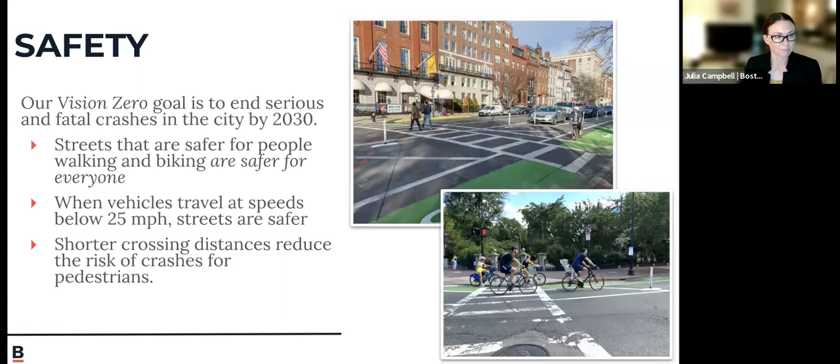You're also going to hear us talk about bikes a lot today. The reason is that most of our streets, especially just a few years ago, didn't have bike infrastructure on them. So we're adapting streets across the whole city to more modern ways, and that includes changing them to include bike lanes sometimes.

We're talking about creating a network, a connected series of facilities where people can use bike lanes to get from one place to another to get where they need to go, so it can actually be a viable form of transportation. We're pretty excited about the network we're talking about in the Back Bay, and we're grateful for the feedback we received last year, which we've responded to in some of the designs you'll see today. We think it's helping us make a really good network.

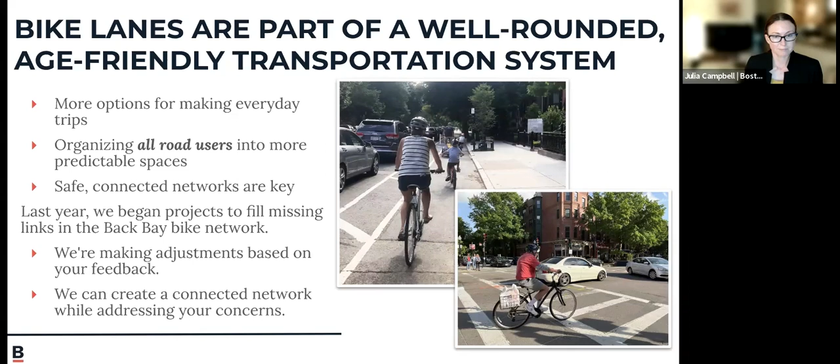So what are we doing here? For the Back Bay, we recognize this is a part of the city where walking comes first. This is a very dense area, with a lot of dense residential area as well as mixed-use commercial. It's the heart of the city in terms of tourism, with people coming in and out and going to different destinations from all over the world.

We understand that most people accessing these destinations from across the world are on foot at some point in Boston. They're accessing the Public Garden, the tourism centers, getting on and off buses, riding bikes. We understand that's actually the core of how people are traveling. Every time somebody gets on and off transit, they are also a pedestrian at some point.

We've also heard, and see every day, that curbside access is very important to the functioning of businesses in the Back Bay, and that limited curb space is really valuable. We understand that's in high demand, and a lot of the changes we're making are intended to help the curbside function better, bringing organization and priority to the people who need to get in and out so our businesses can function.

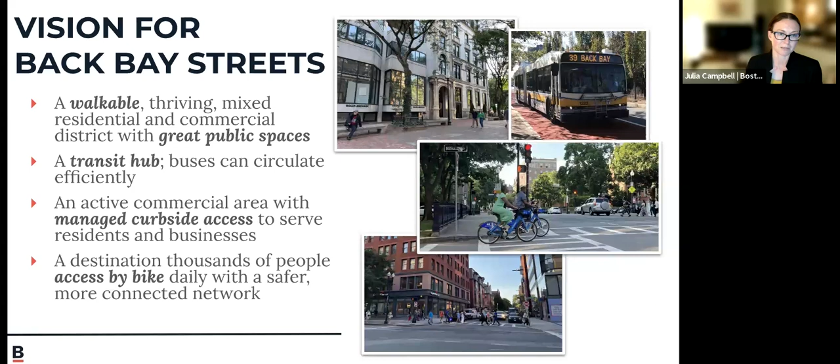So lastly, we will be talking about bikes, but we understand the core is pedestrians. Every time we put a bike facility in place, we are also accommodating pedestrian safety at the same time.

Among the many projects we're running through today, some you might have heard about as far back as 2019. Most of the Better Bike Lane projects we're talking about today were announced by Mayor Wu in fall of 2022, and you probably heard from us or met us in the street at one of our pop-up events last year in the spring and summer when we did a lot of outreach about these projects. Thank you if you talked to us before.

What did we hear from you? We heard all ends of the spectrum. People were really excited about changes to the streets, pushing for safety, and many were really excited about bike lanes and feeling safer riding bikes. We also heard a lot of concern about change, and what these changes would mean for people's daily business. These are some of the comments we're doing our best to encapsulate into just a few points.

We heard concern about maintaining infrastructure for pedestrians and drivers. We heard questions about whether there are other bike routes we could consider, different from the ones we were proposing last year. The answer to that is actually yes. Thank you for those comments last year, and we'll show you those changes in a few slides.

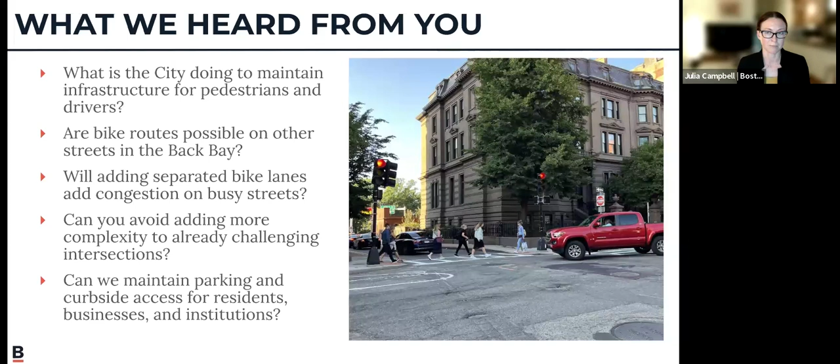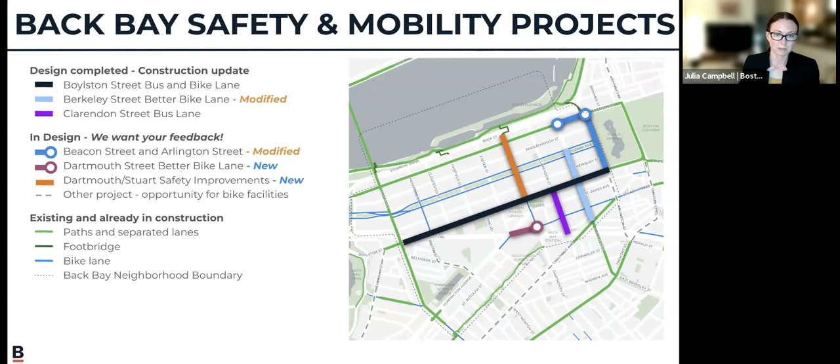Go to the next slide. All right, so now I'll run through quickly the projects that design is all done, and they're going to be entering into construction in the next few weeks. Here is a map of just those projects.

Boylston Street is going to be receiving a separated bike lane, as well as two types of bus lanes - a peak hour bus lane and an all-day bus lane - as well as one block of sidewalk reconstruction from our team. There will also be sidewalk reconstruction on the other side of this block, done by the Parks Department on a separate timeline. Our contractor is going to go through with the installation of the different lanes first, and then that same contractor, as soon as they're done with the lane work, will begin work on the sidewalk reconstruction from Dartmouth to Clarendon, so it'll be one continuous flow of construction.

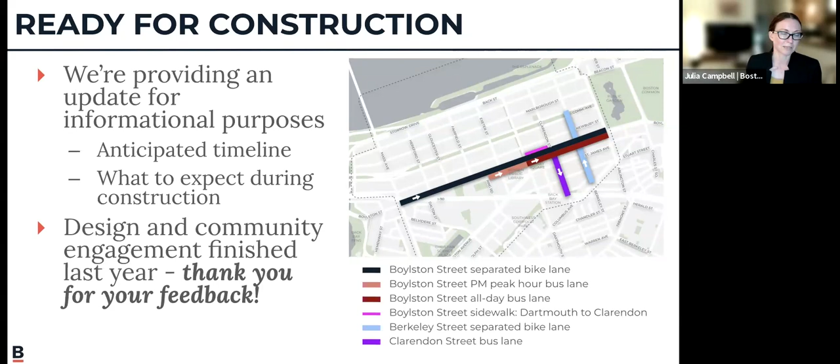Then we also have Berkeley Street Bike Lane and Clarendon Bus Lane. Again, if you have any questions about these, there will be a breakout group. We can go to the next slide, and we'll highlight a few elements of each of these projects quickly.

Just as a reminder, these should not be new - these are projects we've talked about for quite some time. We've got our bike lane, different kinds of bus lanes, and we still retain two lanes for automobile traffic. This will also include some signal work and rebuilding the sidewalk. We can go to the next slide.

Berkeley Street, we're going to be repaving part of this street. Again, that does include upgrading the curb ramps to be ADA compliant, and this is, of course, to install our separated bike lane. There's also going to be some signal changes here.

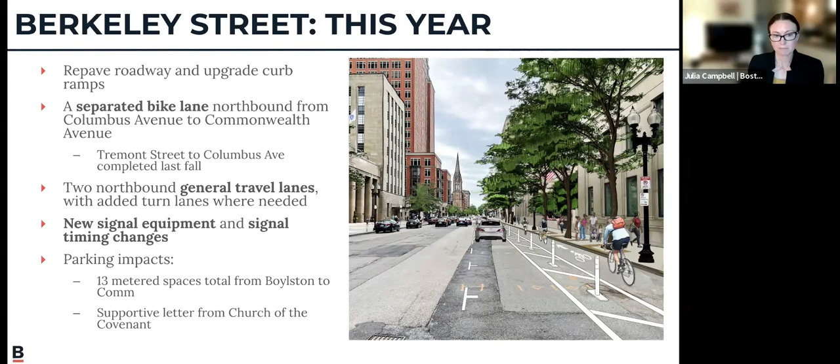And we can go to the next slide. Clarendon Street, later this year, is actually going to formalize and make permanent a bus lane that we first began running in the 2022 Orange Line shutdown. This will include, again, some repaving, upgrading those curb ramps, and this is going to serve routes 39 and 55 from the T-bus.

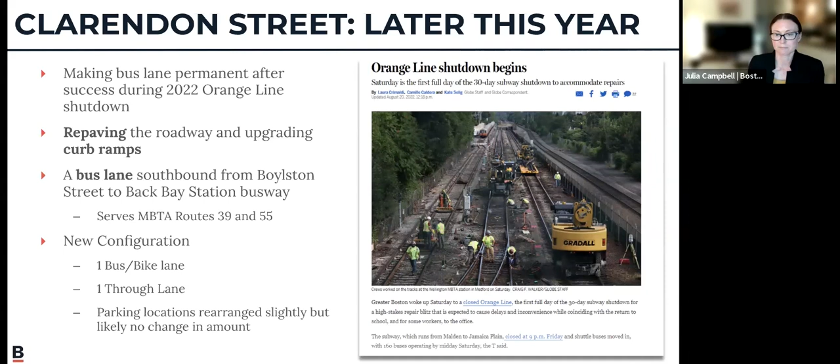We'll go to the last slide in this section. So in the very first part of our construction season, we're going to be doing the Boylston Street work, and that again includes the bike lane, the bus lane, and the reconstruction of the sidewalk. The other projects will follow after that. We do not have exact dates for all of this work right now - we don't even know the exact date because we are finalizing the contracts with our contractors.

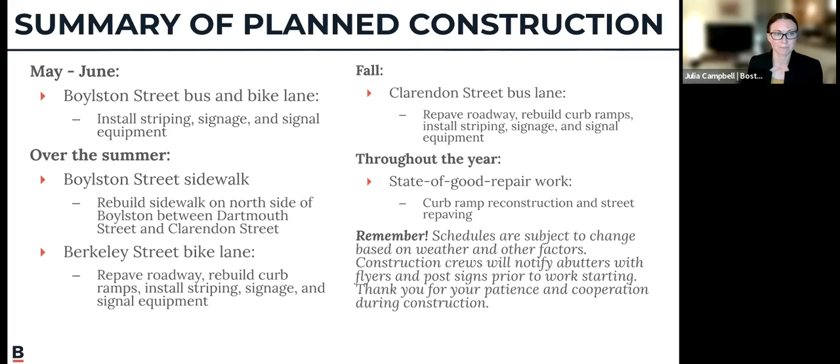Okay, and with that, I will pass it to Nathaniel to talk about projects that are in design.

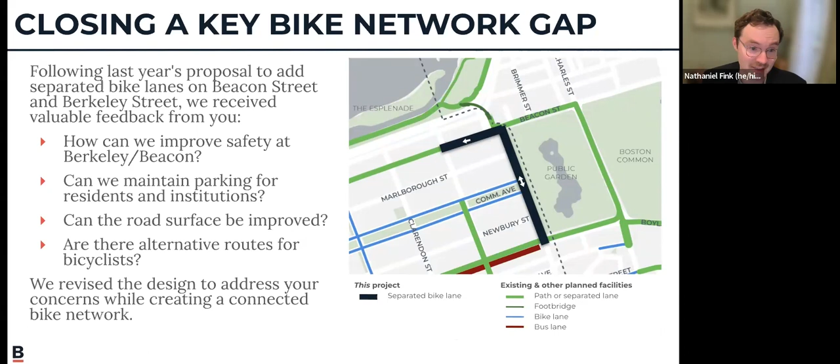So I'm going to start by showing what our initial design proposal was last year. Just a few features: towards the left of the screen, we were proposing a separated bike lane coming north on Berkeley Street to Beacon Street. On Beacon Street, we would have had a two-way bike lane along the northern curb where there's currently parking. Then at the intersection of Mugar Way, we would have had a crossover. Bicyclists going westbound would have crossed over there and continued westbound. Bicyclists going eastbound to the Fiedler Footbridge would have been advised to walk their bikes over to the footbridge at that point.

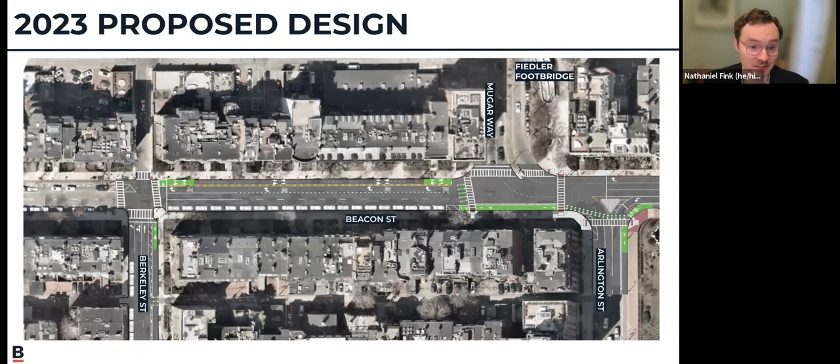This is the revised design proposal. I'm going to walk through various features as they apply to different modes of transportation in the area. Feel free to take a look now, but I'll be diving in more, and we'll have the opportunity to talk through any of these things in the Q&A. We'll also be posting this information on the website for your individual review later.

Okay, so let's talk about pedestrians. One of the key changes is that we're proposing a change to two lanes going westbound on Beacon Street. That right lane would be a through-right lane. I'll get to traffic capacity in a few slides, because I know changing the number of lanes can be a concern. But right now I'm going to talk about why we think this will improve the safety situation.

Right now, because of the queuing, there are sometimes frustrated drivers who have the ability to cut to the front of the queue. That's because there's a center lane that's supposed to be a through lane, which folks use to cut off and get ahead of the right-turning traffic waiting in the right turn lane. With a through-right lane combined, we think this will make it harder for drivers to turn when they're not supposed to.

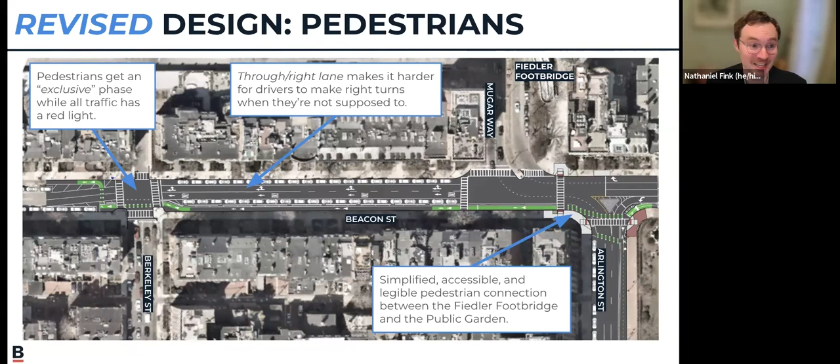We want to make it so that you cross this intersection in 2 stages and really have those crossings lined up much more clearly with the desire lines of where you want to go. It's going to bring you in a direct path onto the plaza at the landing of the Fiedler Footbridge. This will also come with intersection signal timing changes to facilitate the movement of all users through this intersection. We will also have signals and crossings for people biking, and we'll make sure that vehicle traffic is flowing through here as best as it possibly can, given the high volume seeking to access Storrow Drive.

If you are biking, I'm going to start with the revisions to how we are proposing to get to the Fiedler Footbridge. Today, the bike lane along the Public Garden on Arlington Street is one-way southbound. We want to change that to be a 2-way bike lane, so you will be able to bike northbound to Beacon Street.

At that point, there will be a series of marked crossings and signals that will allow you to cross both Arlington Street and Beacon Street to access the plaza in front of the Fiedler Footbridge. Previously, we would have had you coming up Berkeley Street and then turning right onto Beacon Street.

Also, a key feature of this is that we're proposing to move the bike lane on Beacon Street to the south side. One of the big advantages of that is that it avoids conflicts with the right-turning vehicles who are turning right from Beacon Street onto Berkeley Street to access Storrow.

And then lastly, previously, if you're going westbound on Beacon Street, we would have had you crossing just west of the crosswalk at Mugar Way. In this revised proposal, you would cross Beacon Street to the north side just west of Berkeley Street. You'll also have a dedicated phase in which to do that. We do not want to leave you stranded there, of course.

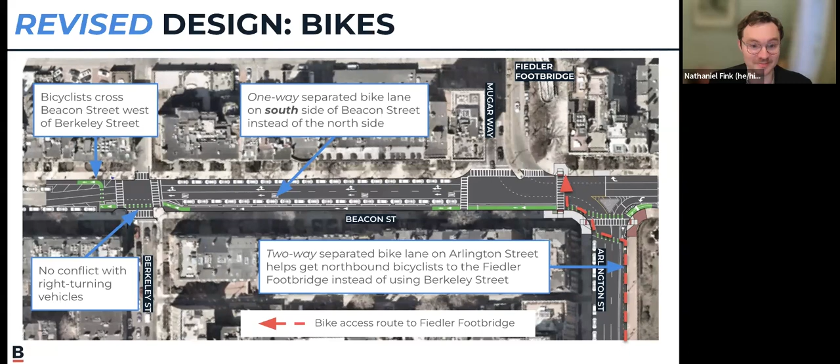And then how this all kind of fits together: this is a map showing connections going northbound for bikes to the Esplanade. Previously, we would have had one connection, which would have gone up Berkeley Street to Beacon Street, turned right, and then turned left onto the Fiedler Footbridge. We now have 2 different options if you're coming from the south, as well as the option of coming from points west along Boylston Street.

And with the Dartmouth Street project, which I'm also going to get to in a few slides, there will also be the option to access the Dartmouth Street footbridge, both by going north on Berkeley Street to Comm Ave, or by coming eastbound on Boylston Street from the west, turning left on Dartmouth Street.

So really, we're trying to stitch together all of these different connections. And while we do acknowledge that we are proposing to remove a link in the network that we were initially proposing, we really do feel like this is a better option because there are more options to filter through the street grid and to get to the various different points.

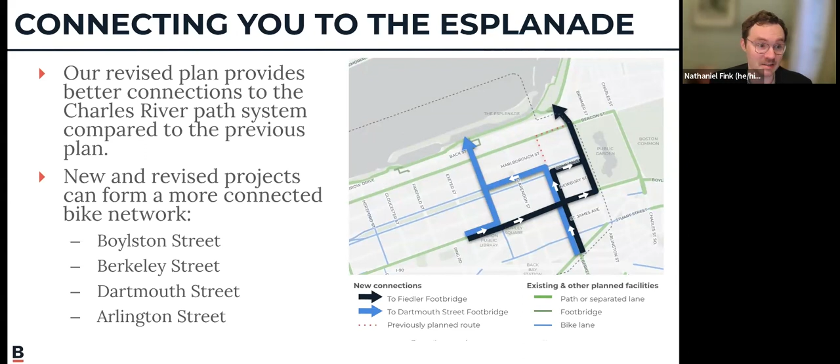Okay, parking. We know that there was a lot of concern about loss of parking in this area. I can say with this revised proposal that we would be keeping parking on both sides of Berkeley Street in between Comm Ave and Beacon Street. We would also be keeping parking on both sides of Beacon Street in between Mugar Way and Berkeley.

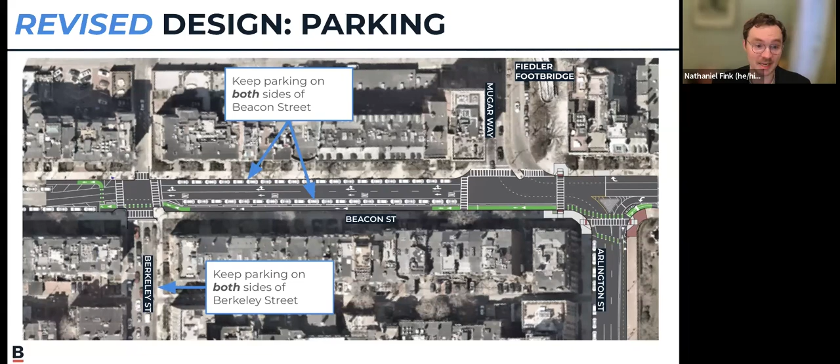So while there will be some marginal reduction in parking spaces right around the intersections and a few just west of Berkeley Street, the net change is significantly less than what we were initially proposing. We're really striving here to maximize the number of parking spaces we can while still achieving these goals of connecting the bike network and keeping all travelers moving as safely as we can.

Okay, traffic capacity. As I mentioned previously, we are now proposing to have two lanes on Beacon Street westbound. The right lane will be for continuing straight and turning right, and the left lane will be for continuing straight only. On Berkeley Street, we're not proposing any changes to the number of lanes that are there today.

I want to take a moment to talk about how we plan and design traffic signals. We have standards and processes that we use when considering changes to any signalized intersection anywhere in the city. I'm not going to go into a lot of detail, but we generally follow a few steps. First, we gather traffic data to understand the current conditions.

The data we used to model this particular intersection was collected in late 2022. We know that conditions can fluctuate throughout the time of year, and we also know that conditions have fluctuated quite a bit since the onset of COVID. Nonetheless, we are confident that data collected late in 2022 is generally still representative of traffic conditions.

If we had collected this data in 2020, we would have definitely recollected it more recently. So that is our starting point for this analysis.

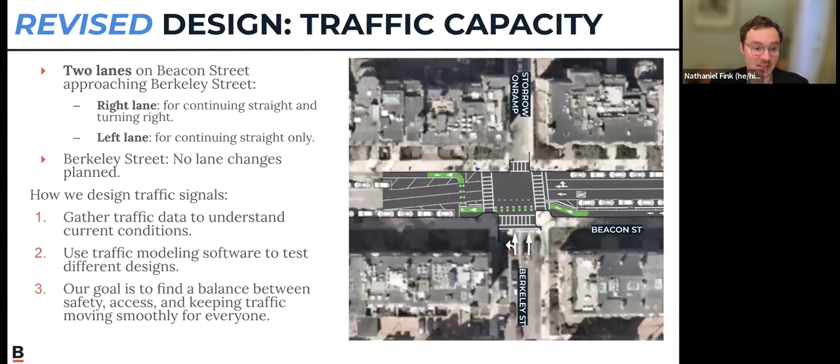So I'm going to show the results of some of our modeling. In the proposed condition, this is what we have modeled as the 50th percentile—that's roughly about half the time. And the 95th percentile is the vast majority of time. These are how long we expect the queues in the morning to be.

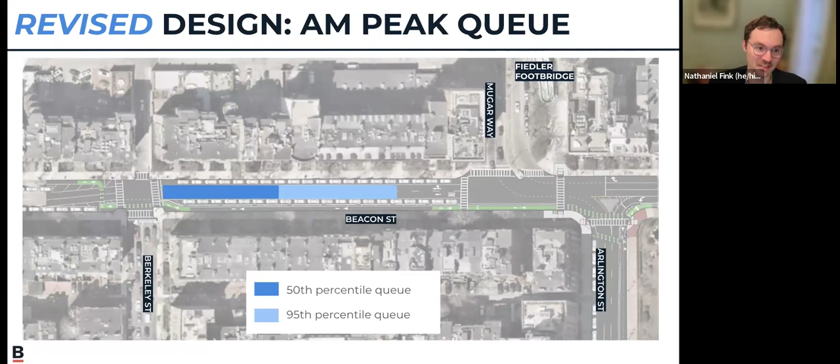Folks who live in this neighborhood will know that it's much busier in the afternoon, so I'm going to move on to that. In the PM peak, you can see a little red line here that indicates where our model shows the current 95th percentile stretching back to. With the proposed condition on Beacon Street, it goes a teeny bit further back, but not significantly further.

Now, we also know that there are times when not only Beacon Street, but Berkeley Street and Charles Street are all backed up. Sometimes Storrow Drive is at complete crush capacity. Although we would like to keep folks moving through here, frankly, there is no amount of lanes we could add to Beacon Street and Berkeley Street that would facilitate that in those situations.

Because you have all traffic basically filtering down to a single lane going onto Storrow. And if the road itself is already backed up, or say someone drove a truck onto Storrow Drive and crashed into one of the bridges, there's any number of conditions that could result in that road being congested. So what we are trying to solve for is the vast majority of time when Storrow is relatively free-flowing.

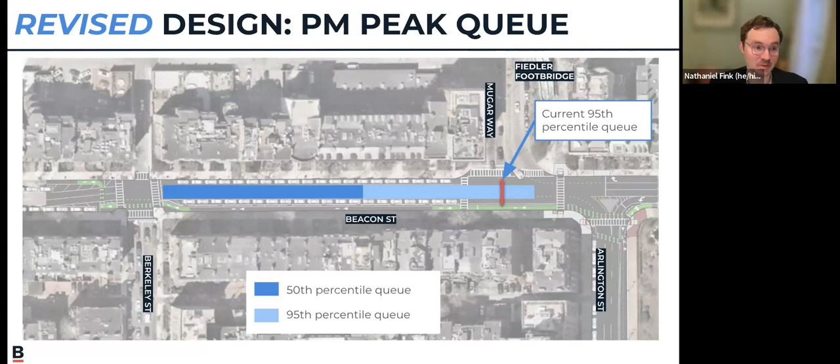And again, that is what we call the 95th percentile. So we acknowledge this is a model, but this is the method we use to analyze before and proposed conditions and compare them to one another.

I'm going to walk through the signal phasing, and that is what we're proposing at this intersection. During the first cycle, this is when all Beacon Street westbound traffic would go, including right turns onto Storrow Drive. During this phase, we can also have the southern crosswalk on walk because there are no conflicts across it.

If you are biking, you will also go with this green, and then you will wait in a little staging area just on the west side of the intersection.

So phase 2 is a phase that will come up if you push the pedestrian button. If you do not, it'll go to phase 3. The reason for that is it allows the model to run a bit more smoothly. If anyone is trying to cross on the northern crosswalk, or any crosswalk, and pushes the button, this phase will come on after Beacon Street has its green. In this phase, all of the crosswalks are on, and if you're biking, you can complete your crossing of Beacon Street onto the north side, where the protected bike lane continues in the westbound direction.

Cycle number 3 is when Berkeley Street traffic goes. If no one pushes the pedestrian button, this comes on after phase 1. If it comes on after phase 1, you get what's called a leading pedestrian interval, or pedestrian head start, where the walk sign comes on a few seconds before vehicles get their green. That allows pedestrians to become established in the intersection and partially complete their crossing before traffic starts moving. Bicyclists waiting in the staging area should also have enough time to complete their turn. I want to emphasize that leading pedestrian intervals are one of the safety features we can implement, so that no matter what happens, whether someone pushes the button or not, you'll have a safer way to cross the street.

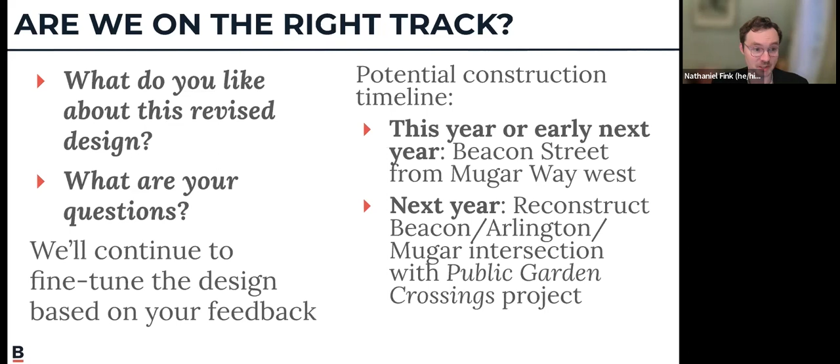We're going to continue talking to you, answering your questions, and fine-tuning the details as we go forward. I also want to note that the intersection of Arlington Street, Mugar Way, and Beacon Street is part of a project called Public Garden Crossings. It's technically a different project with a slightly different timeline, and it will be constructed under a different contract. So what this likely means is that we'll get to Beacon Street from Mugar Way west before we get to that intersection of Arlington, Mugar, and Beacon. The conditions we've been discussing, shown in these extended slides, reflect what the final condition will be. I'm noting that to set expectations—we're moving towards having this connection for pedestrians and bicyclists fully built, but it will happen in different phases.

Okay, Dartmouth Street at Stuart Street. I'm going to pause for a quick sip of water now.

The location of this project is at the corner of Stuart Street and Dartmouth Street, about 1 block away from Back Bay Station and about 2 blocks away from Copley Square. This is a heavily used intersection for pedestrians. Based on feedback from the community and your elected leaders, we looked at this intersection and found some quick build interventions we can do here. Some of the issues you brought to us were uncomfortable pedestrian crossings and high turning speeds for vehicles, made possible by very wide turning lanes built in the 50s and 60s to accommodate fast-moving traffic, not reflective of the dense urban environment we have today. The data also bears this out—this intersection is a high crash intersection for all modes of travel, based on our Boston Vision Zero safety data.

The timeline for this project, because it's a quick build project, is potentially 2024 construction, and if not, 2025.

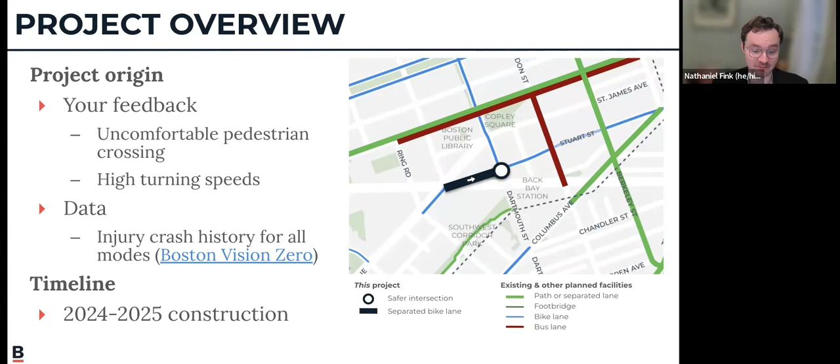This is a preview of the design that we're working on. We're hoping to use quick build materials. Those are things like changing the roadway striping, changing the signage, and putting up flexible plastic barriers.

What we can do is shorten the pedestrian crossings on 3 out of the 6 crosswalks at this intersection. The crosswalk across the northern leg, which allows drivers to turn from Stuart Street onto Dartmouth Street, we can make about half the length it is today. We can also shorten the main crosswalk across Stuart Street on the west side, as well as the crosswalk across the slip lane that allows you to turn from Stuart Street onto Dartmouth Street southbound. That can also be about half the length it is today.

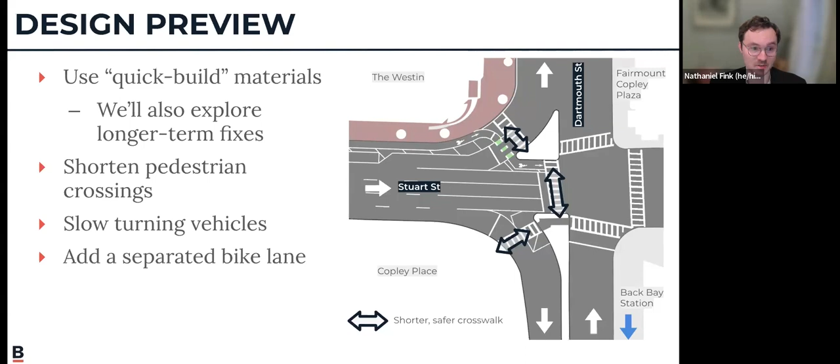These are quick fixes. We are also hoping to explore longer term fixes that would potentially involve bigger changes to this intersection, possibly partnerships with development that may or may not occur in this area in the foreseeable future. Lastly, there is a bike lane on this section of Stuart Street between Huntington Ave and Dartmouth Street. With the space left over from narrowing the vehicle lanes and turning radiuses, we can provide a protected bike lane for that one block that gets you as far as Dartmouth Street. So this is an upgrade to an existing bike facility.

Okay, so this is another new project. This came out of our conversations last year, both with the community as well as the feedback you gave to your elected officials. We are looking at a project to put a bike lane along Dartmouth Street between Boylston Street and Back Street. This is new, and we're going to share some initial designs with you. We're very interested to hear your feedback and thoughts around the design alternative we're proposing.

So again, this is some geographic orientation. The dark line shows the location of the project in context with the neighborhood. This would be between Boylston Street and Back Street. We are looking at a two-way bike facility here to provide a clear, direct, and legible connection between Copley Square and the Esplanade that would serve tourists, shoppers, commuters, neighborhood residents, really anybody traveling between the Charles River Path system and the heart of the Back Bay.

Some of the feedback we heard last year centered around the idea that Dartmouth Street could actually be a better route than Berkeley Street, which we had initially proposed, especially because it connects you right into the heart of the neighborhood. We also know we've got a lot of folks riding Bluebikes in the area, some of whom don't know Boston very well, and sometimes you encounter them riding on sidewalks. When we have separated bike lanes on our streets that people feel comfortable using, that draws people away from riding on sidewalks.

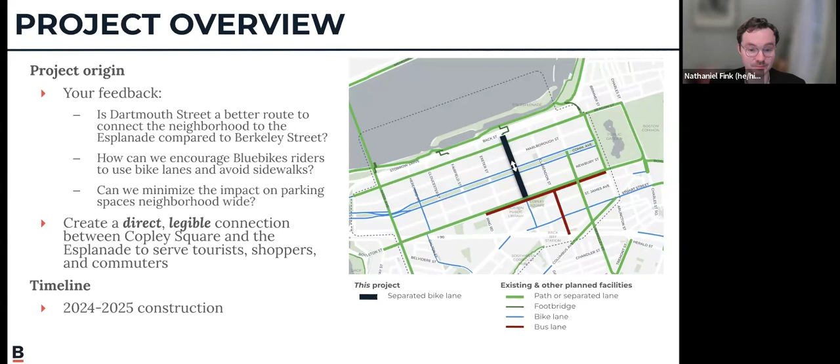So this is a preview of the design proposal. As I mentioned, we are looking at a two-way separated bike lane that would run along the east side of Dartmouth Street between Boylston Street and Beacon Street. We considered a variety of different options, but we feel putting it on the east side makes the most sense because it has the fewest conflicts with turning vehicles. In particular, a lot of drivers turn left from Dartmouth Street northbound onto Comm Ave westbound. If the bike lane is on the east side, it completely avoids that turning conflict, and it makes it easier to integrate the bike lane into the existing signal pattern.

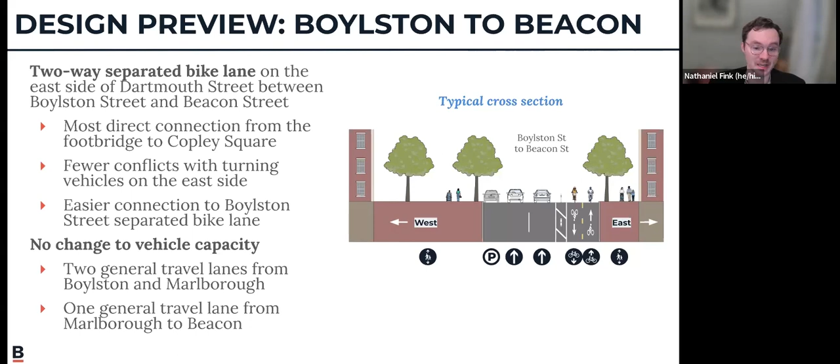It is also an easier connection to the soon-to-be-constructed Boylston Street bike lane, and it's a very direct connection from the footbridge right into Copley Square. We can also do this without changing any vehicle capacity, so this would remain 2 general travel lanes between Boylston Street and Marlborough Street, and 1 general travel lane from Marlborough to Beacon. We also have the very short block between Beacon Street and Back Street, which is the last mile connection to the footbridge.

On this section, we would be installing a northbound contraflow bike lane. This is a short section of bike lane where we put in striping and signage to indicate that bikes can flow in the northbound direction. In the southbound direction, because this is a very lightly traveled block for motor vehicles, we would have bikes sharing a general travel lane between these 2 locations.

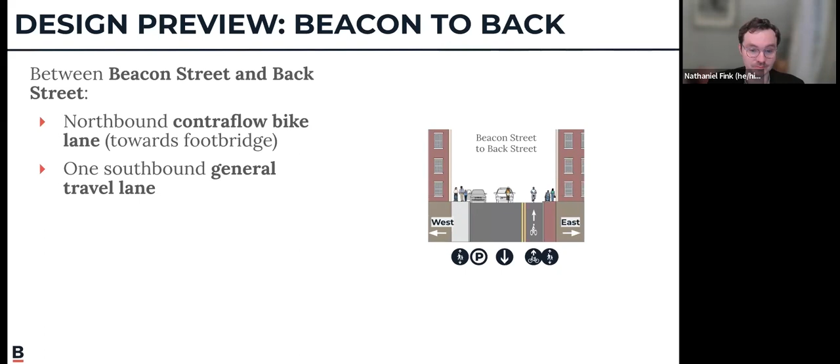So there is some impact to parking with this proposal, but as I said earlier, there is a significantly smaller net loss to parking throughout the neighborhood than we would be seeing in the previous proposal. So parking would remain on the west side of Dartmouth Street here.

This is a preliminary estimate of the parking impact, and I just want to stress these figures are subject to change. We will be continuing to talk with you and walk through the different alternatives, and as we refine the design, these numbers could very well change. So I want to emphasize that this is a starting point. This is not written in stone in any sense of the word.

So we'd be looking at a preliminary impact of about 31 to 39 spaces between Boylston Street and Back Street. The vast majority of these spaces are metered parking spaces during the day. Like I said, we can work with you to fine tune these curb regulations so that there's ample space for loading and pickup and drop off as appropriate.

I'm not going to get too much into the various alternatives that we considered when this proposal initially came to us. Folks initially recommended making the existing northbound bike lane, which is currently unprotected, into a protected bike lane without having southbound traffic. But we do want to make sure folks can travel southbound, because if we don't, they're going to find their way to the wide sidewalk on Dartmouth Street, take any number of nearby streets, or simply not make the trip at all. So by putting in a two-way facility, we can really channelize all of the demand onto one street.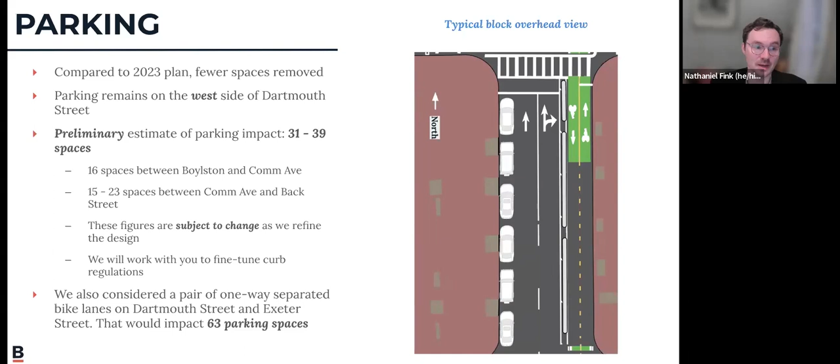So again, we know this is the first time you've seen this proposal. We know that some folks who have chatted with us previously may have had a different idea about what Dartmouth Street could look like. So we want to give time for folks to sit with these ideas, think about them, ask us questions, and go through a process of fine-tuning these designs. I'll note, and we'll share more about this later, we're going to have virtual office hours coming up, as well as other ways to chat with us and send in your feedback.

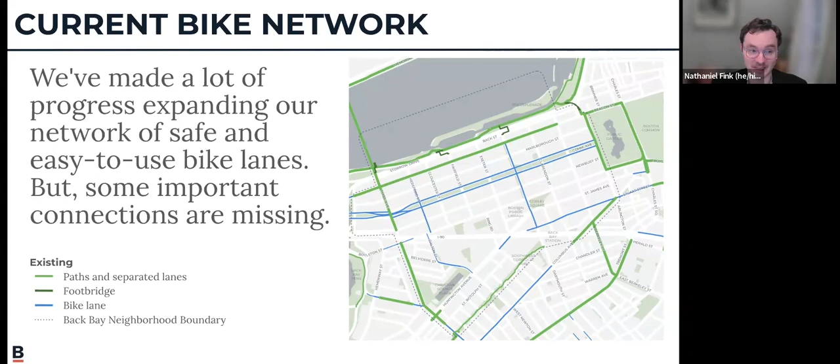So the emerging bike network that encompasses the projects we are talking about tonight looks something like this. Clearly we have more work to do, and this is not necessarily the final product, but this is what it would look like if we were to implement what we have shown tonight. So we've got nearly 2 miles of new high comfort bike facilities coming in the next few years, and these would be filling gaps and helping to create a more connected network throughout the neighborhood.

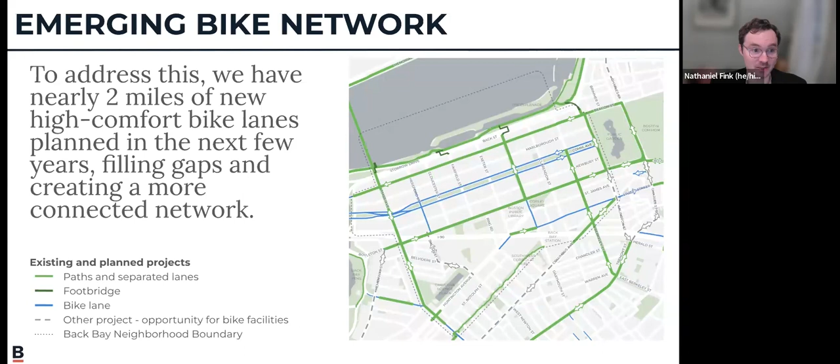Okay, so we're going to move on to next steps now.

As Julia mentioned, construction will be starting soon on Boylston Street, Berkeley Street, and Clarendon Street. We will be doing the state of good repair work throughout the construction season, which lasts from now until roughly late November, and those projects will be happening on an ongoing basis. We will not be hosting big meetings like this for each of the repaving projects. Instead, crews will notify abutters on the streets where they're going to be repaving, and they'll put up temporary signs directing people what to do during construction. We know that can be inconvenient, but the result is that you will have a shiny, newly paved street and new curb ramps.

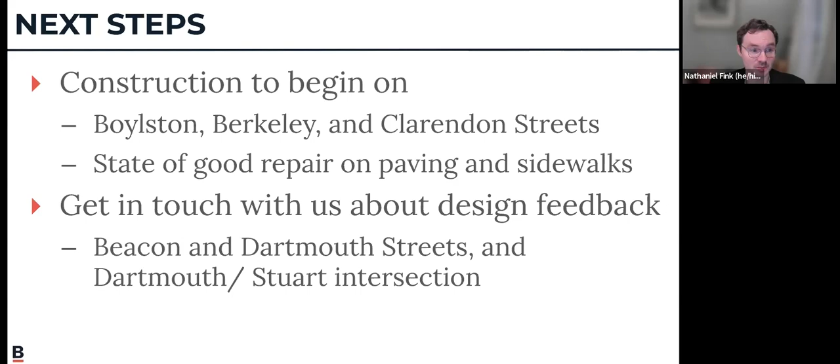We're also going to talk about ways you can get in touch with us to share your feedback on the new projects we've talked about tonight. This will be available on the website—we're going to post this presentation. You can send us an email at better-bike-lanes@boston.gov. We also have a new website that brings together all of the projects we're working on in the Back Bay, accessed at boston.gov/back-bay-streets.

And we will be hosting virtual office hours. Those are going to be on Wednesdays, and we're going to offer ones in the morning as well as in the evening. That's an opportunity where anyone in this meeting, or really anyone in the public, can sign up for a 15-minute time to talk with us either on a video chat or over the phone to discuss these design proposals, ask your questions, or share your feedback. We'll have the specific dates and times listed on the website. The first one is next Wednesday. We also have a Mayor's Neighborhood Coffee Hour coming up on June 18th for Back Bay and Beacon Hill.

Okay, so breakout groups. As previously mentioned, there will be two opportunities: either stay in this current Zoom room where you are now and talk about the designs we're still working on—these are the design for Beacon Street between Mugar Way and Berkeley Street, Dartmouth Street at Stuart Street, and the two-way protected bike lane on Dartmouth Street between Boylston and Back Street—or opt into a breakout room to specifically talk about the upcoming construction on Boylston Street, Berkeley Street, and Clarendon Street.

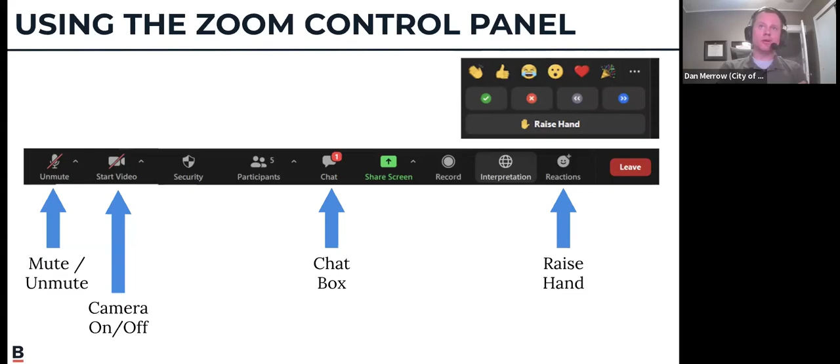Especially on blocks such as the A to B block, where keeping that traffic moving is a critical concern. Dan, I wanted to say something. That was half of what I wanted to say - yes, to deal with that we need short-term parking so those people have places to go. Additionally, the traffic software we use does account for friction from parking vehicles. Obviously, if we have delivery vehicles double parked all day, that's an extreme scenario.

So the best part here is, if you are concerned, if you think delivery vehicles need space and you know a good place for it to go, please tell us that, because getting those vehicles pulled over into short-term parking really helps make the traffic flow easier, better, all of the time. If you make them 30-minute meters, you haven't solved anything.

Agreed. That's been the plan put forward as part of the revised parking in the Back Bay. 30-minute meters will not be occupied by UPS trucks or FedEx trucks or anybody like that - they might be occupied by cars, but that doesn't solve the problem. Double parking is a rampant, difficult issue in the Back Bay among other neighborhoods, and on that block, when you take it down to 2 lanes, it's end of ball game. Whether or not the numerical analysis shows it, the reality is that the ball game will stop.

Thank you, Elliot. Councilor Durkan, did you want to weigh in? I see your hands up. Oh, hold on. Oh, thank you so much, sorry, I had a muting issue.

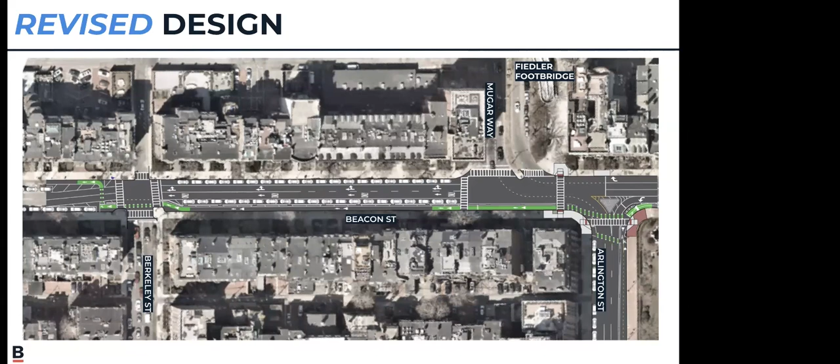Yeah, I can answer both of those questions for you. Oh, also, if you could mute yourself, I'm getting a little feedback. Yes, sorry, no problem. So, the second question first, because that's easier.

Yes, there will be hardened protection between that bike facility that does not have cars, so that it won't just become parking. There will be some sort of curbing there - I think we have it as concrete right now.

Second is your question about that northbound left on Arlington to this space. It does look weird, I agree, but the only time that movement is available is when there are no cars coming southbound down the Arlington Street barrel, so there are no conflicting movements. The lefts off of Beacon are held, the left rights off of Mugar are held, and there's time for bikes to make that crossing, get around that corner and into the protected bike lane before any vehicles are allowed to come through. That time is built into it. That time is important - we cannot leave people in that space around that corner while vehicles are moving through the intersection. It's not a safe condition.

So the intent of the design and the timing of the design is for people to be able to get around safely through to the protected bike lanes while vehicles are not moving in that area.

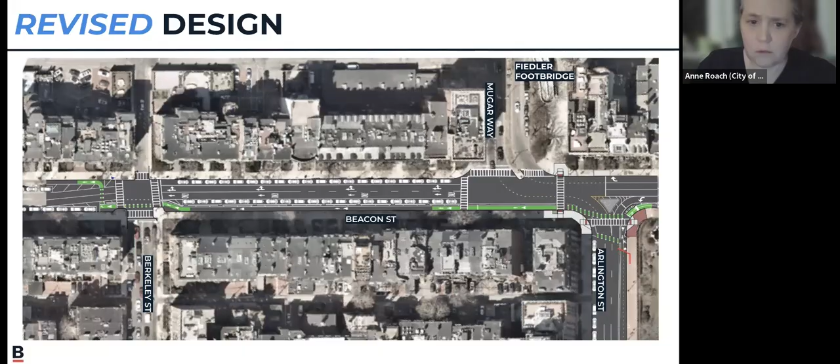Great, thank you very much. So I'm with the St. Botolph neighborhood, which is actually technically part of the Back Bay, even though we're kind of separated. And I have...

First of all, I just want to say this format is amazing. It is actually evident that you are taking feedback from neighborhood representatives and residents in real time and using that feedback to adjust things, and that's really impressive. I want to thank you for that. I also really like the way you set up the meeting in terms of projects that are underway, projects that are in design, and future projects. There's always a big confusing aspect to all this, so that makes it very clear.

My question is this, forgive me if it's a little off topic. I see in the St. Botolph neighborhood, our main intersection is at St. Botolph and West Newton. We've been talking to the city for a long time about improving and upgrading that intersection. My concern is that on the map it looks like that section of West Newton will be paved either this year or next. I'm concerned that if you pave it, are we less likely to ever get an improvement done because hey, you guys just paved it? I'd love your recommendation as to what I can do to further this conversation and get attention given to that intersection as part of the plan, so that when you repave it, perhaps there's other things you can do at the time. Thanks.

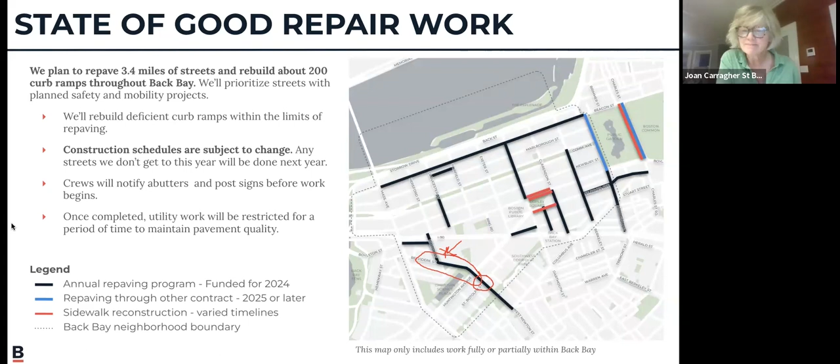There you go. Hi, I'm Bob, and this is Pat O'Neill, so I just got volunteered as a spokesperson. We live at the corner of Berkeley and Comm Ave for about the last 15 years. To follow Anne's early instructions, I would just say I agree with several things. One, Nathaniel, thanks for the thoughtful, informative presentation, fantastic. I agree with Joan's compliments about this format. I agree 100% with everything that Elliot said, if anyone can remember all those things.

And lastly, I appreciate your efforts. I'm a walker, biker, runner, and I'm afraid trying to get to Fiedler Bridge, so I skip at night - now I go down Dartmouth. But if you could get me across there without me waiting 5 minutes or killing me, that's great.

I don't have the solutions. The ones you said sound like good ones. But my comment, and really it's a question, I don't have the solution to it. I made a comment in the chat room as part of this. There are behavioral issues that, regardless of how we think the design is going to work, we have people who drive cars, walk, run, bike, use scooters, and so forth. Right now, we live in the corner here.

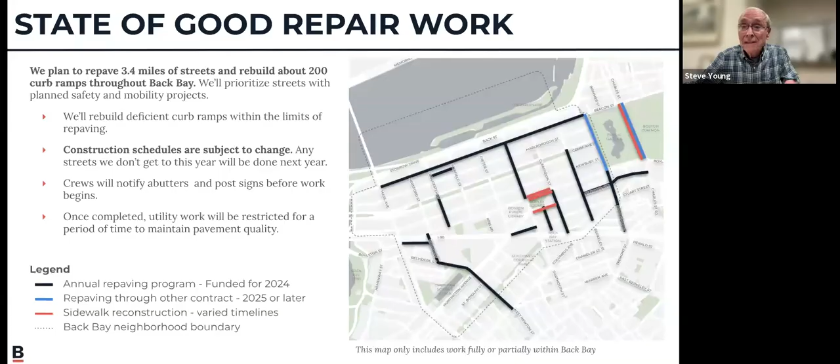And they're entering the bike lane that exists right now, that is widely used. I use it myself. It's right beside a grassy area, not beside cars, not beside buildings or houses, nobody walking into the lane. They can do that, and they'll be on that bike lane before they'd be across the dangerous Arlington-Mugar intersection.

For the city not to be seriously considering encouraging cyclists to do that and continue on Commonwealth past Berkeley into the same bike lanes... the city's plan is now directing bicyclists on Berkeley Street who are coming from the south to get onto the existing bike lane on Commonwealth Avenue and continue on westward. If they want to go past Mass Ave, they go under the bridge and past Mass Ave.

If they want to take a left, well, they're not going to go south of Mass Ave, but if they want to go north of Mass Ave, they do that from Commonwealth. Or they can continue on and take a right on Dartmouth.

I haven't seen traffic studies that show what has happened on Commonwealth during the many years we've had a bike lane there, in terms of safety, accidents, and cyclists getting injured, or anybody else getting injured because of that bike lane. But I find it to be a very safe one as it is. And if that's wrong, okay.

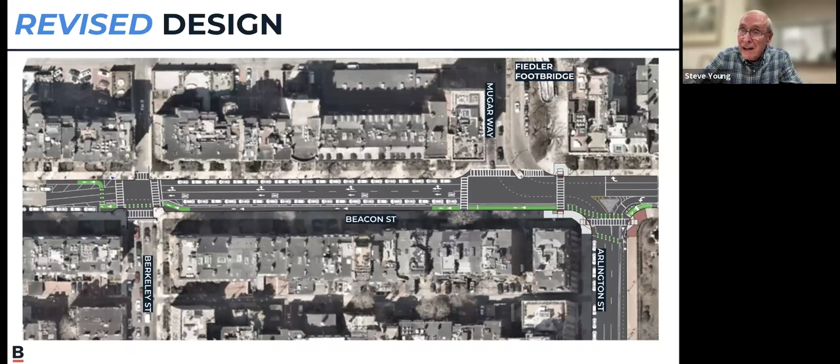It works in 90% of the places you're trying to do it. In this particular block, it doesn't work. It makes things much more dangerous for everybody involved. And just to say you want to do it because you look at a piece of paper and it shows a nice straight line all the way down Beacon is not reason enough to not seriously consider a reasonable alternative.

Steve, thank you. I want to try to get into some of your questions.

So just zooming back to the big picture, we have a disconnected bike network in this section. As you mentioned, we had a street safety project on Beacon Street finished in 2018, in which we put in a separated bike lane on the north side of Beacon Street from Berkeley west to Mass Ave. We also have a one-way, currently protected, bike lane going around the public garden. Essentially, we have a block-long gap that does not allow folks to connect from point A to point B.

So that is the place we're starting from when we're talking about closing this gap and putting a bike lane on this section. We fully acknowledge that this is a complicated block with a lot of traffic. Ultimately, our ability to move cars through here, whether they're coming from Berkeley or Beacon Street, is really governed by the pinch point getting onto Storrow Drive. So we are working, sometimes within the margins, of all the regional traffic that filters through our city streets and through your neighborhood to get to on-ramps to highways.

When we make adjustments to signal timing and the number of lanes at an intersection, we take all of those things into account. Some of the changes we've made have been responsive to concerns raised by folks such as yourself in the community. One of those is moving the bike lane to the south side of Beacon Street.

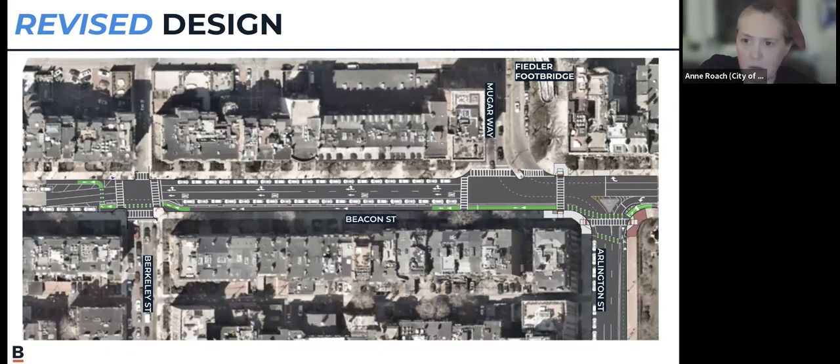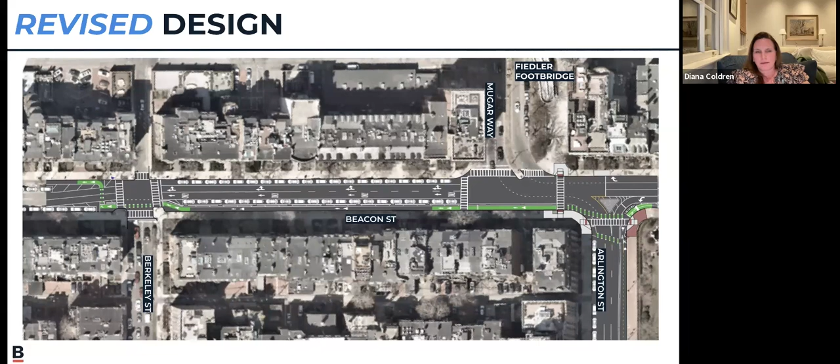Thank you. Hi everyone, my name is Diana Coldren. I'm a resident of Beacon Hill. However, I use this stretch of Beacon Street almost daily, by walking or driving. I used it about 15 years, twice or three times a day, so I'm very familiar with it. Thank you for all your thoughtful input and analysis.

I guess I echo Steve Young's comments about the data. My concern is that the proposed design, the data that was looked at, I believe was 2022. Is that correct? I would just urge that perhaps that data is looked at again before implementing this design, and really carefully considered.

I also appreciate these types of calls, and I would hope that they would continue, I would suggest, on a quarterly basis, because transportation changes. In our city for hundreds of years, the streets have gone different ways.

We've added bike lanes, and now, as we can see in other major cities, the influx of these mopeds, I don't think is going to change. If you go to New York City, they are proliferating. It's dangerous to cross the street. I think we should take this very seriously.

The fact that they're allowed in bike lanes, the fact that we often cannot see how these mopeds are registered, licensed, or how to report them. They're going on sidewalks—I've videotaped them all over the city. It's very, very dangerous. I'm worried about someone getting hurt.

So while I appreciate the bike lanes, I think we have to be concerned that they're going to turn into distribution lanes, because they will be accessible by these delivery people and will be utilized by them more and more. I think we need to be aware of how that's going to impact the regular bicyclists.

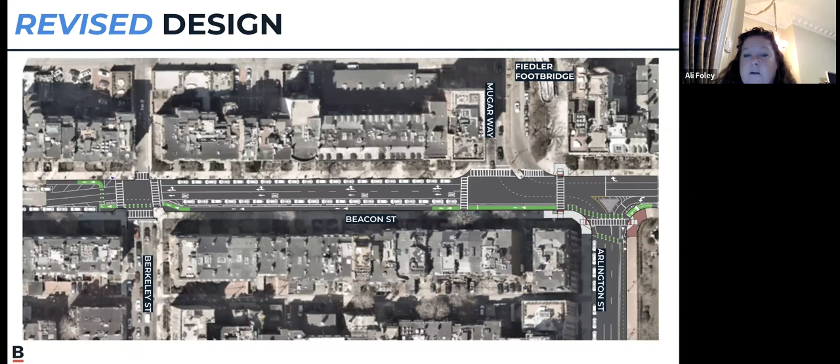So I'll just leave it there, but I have some serious concerns about that. And then lastly, I am all about data. I come from healthcare, data is king, data drives every decision you should make. I don't think making street design decisions on 2-year-old data is the best idea here. I do believe that we should take fresh data counts and take a look at the impact when we are at high peak volume and high delivery volume, with all of the Uber, Amazon drivers, USPS drivers, FedEx, everything. We're often already down to a single lane on Beacon Street, literally a single lane. So I'm not sure this squeeze that you have in mind on Beacon Street is going to help that any more. I really think it's actually going to be counterintuitive to relieving congestion in the city, especially in this stretch. I'll leave it there, and I do thank you for the forum and for the creative design, but I do have safety concerns, which should always be number one, and I do have congestion concerns as well.

Thank you for your comments. I'll hand it over to Dan in one second, but I just want to reiterate that paramount to every street design project that we do, pedestrians are always first. Safety is always first too. And I know we've been talking a lot about bike lanes and connectivity in this meeting, but if we drill down to the scope of work we're talking about, part of it is to connect two stubs of the bike network that currently are not connecting to each other and are thus forming a gap.

It would be kind of akin to if Fenway did not connect to Storrow Drive via the Bowker overpass. A lot of people would be saying, how do we get those two points to connect? How do we get users to move between these two points? It's kind of the same thing here, just a different mode. And so that's why we're in the weeds on that particular topic. But again, pedestrian safety is always paramount.

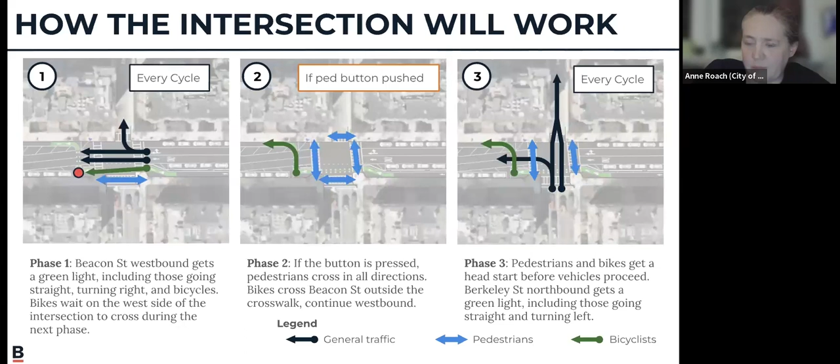I'm done. Thanks. Thank you, Stephen. Who's closing? I think we've reached the end of the questions.

Yes, that is a radical solution. I think that highlights the thing that you said earlier, which is that we are trying in many ways to solve for space of how many cars, how much space these cars take up moving through this block. And that is what engineers such as Dan do on a daily basis. And I guess I'll leave it there.

I don't know if anyone else on the city side, either Julia or the chief, Deputy Chief Campbell or Chief Franklin Hodge want to say anything here.

Sure. No, I was just going to say, Stephen, appreciate your comments and the reality check that you bring. Dan is an excellent engineer. He does work a lot of magic. But yes, I think that even couching any change that we make to any street, we are not starting from a place of perfection. So I appreciate your comment, just recognizing that we're starting from a system that has challenges every day, and we're trying to make things better.

And we are a team of professionals that are dedicated to this work. We're doing our best to make things incrementally better all around, but we are certainly nowhere near perfect. So just appreciate that comment.

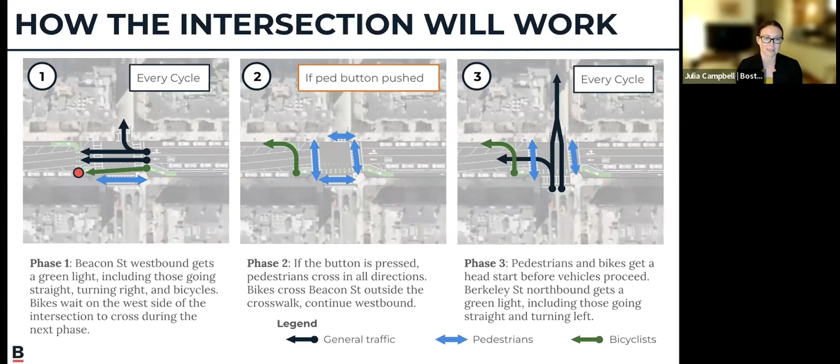I'll hand it to the chief. Take us out. I will just close briefly because it's 9 o'clock and say thank you to everybody for sticking on this call, for sharing your feedback, for the spirited back and forth, but also for giving us a chance to show our work and to have your perspective and your response to that be something that we can consider as we figure out next steps here.

So I think we have some work to do to kind of integrate all the things that we've heard. We want to keep dialogue going, but we hope to come back to the community with some responses to some of the things, and to look at especially some of the elements of this that are newer, to say what further changes might we look at, or alternatives or approaches that we can bring that are responsive to what we heard here tonight.

So really just most of all, thank you. These projects, the work we do is at its best when we go through this process, as time intensive and as kind of high energy as it can sometimes be. Your input, your presence, your feedback helps us make all the work that we do better. So I very much appreciate it, and thank you.